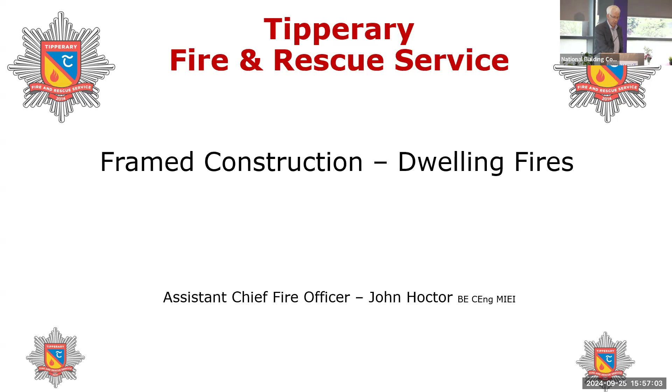So in terms of the actual presentation, I suppose the agenda is around dwelling fires and showing the experience that we are perceiving both here in Ireland and also internationally around dwelling fires. Looking at where house stock has been in Ireland and where it's going, looking at construction trends worldwide, and then looking at some academic literature out there around fire engineering practice and some concerns being raised by some of the subject matter experts.

A quick overview of kind of how we approach building control within Tipperary Fire and Rescue Service. We're both the Fire Authority and the Building Control Authority within Tipperary Fire and Rescue. And then some suggestions that are out there really for discussion. And I suppose what I want to do is acknowledge kind of the work the department are doing in terms of the Fire Research Group and also the group inside in Galway in terms of Construct Innovate and the work they're doing. So they're taking on some of the suggestions that we've been going to raise.

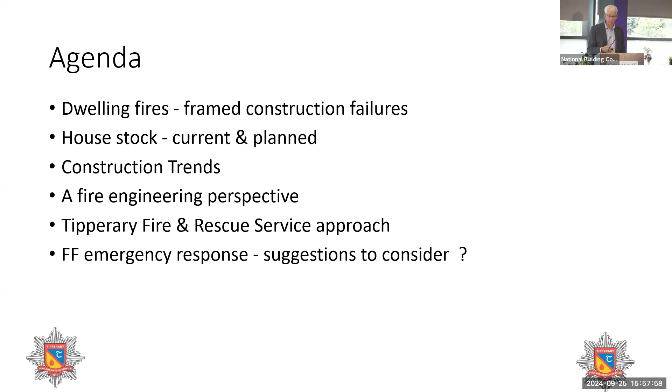So firstly, the good news for fire fatalities in Ireland, we're running at about 6 fire fatalities per million per year. And in terms of all the countries around the world, that's best in class. And in context, the US has got about 13 deaths per million per year in 2021. So we've had a huge reduction over the last generation or so in Ireland, okay?

The department have been very proactive in terms of actually, particularly dwellings, of improving the standard requirements in terms of buildings, and all new construction since the recent revision of Technical Guidance Document B, Volume 2, requires fire detection alarm in all habitable rooms, LD2 classification. They've also published supplementary guidance in terms of achieving the fire standards for fire-resistant construction in domestic dwellings.

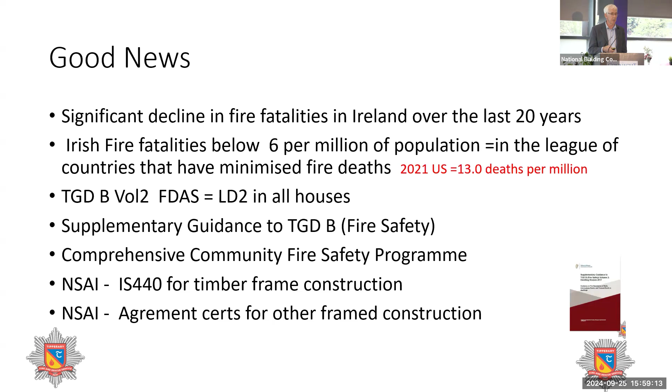And then within the fire service, in conjunction with the National Directorate of Fire and Emergency Management, we have a very extensive community fire safety programme, which is giving us tangible results in terms of reduced fire fatalities. The NSAI are very active in the whole area, and we've got standards in terms of wood frame construction or timber frame construction, IS 440. And then for other frame constructions, there's Agrement certs in place. So it's not a construction methodology that's without any guidance or regulation.

I also want to acknowledge the very busy environment that the National Directorate of Fire and Emergency Management work in. You're probably aware of kind of the industrial action with firefighters last year, and that WRC agreement is still subject to negotiation. We've got this new national mobilisation for the regional control centres being rolled out. We've got an extensive capital programme within the Directorate, and then there's also very extensive work being done in terms of equality inclusion within the fire service. Largely the Irish Fire Service is male orientated, and then the work is now to try and make that more representative actually of the overall community.

We've got a validation process that comes in externally to all the fire authorities. We've got follow-up from the Stardust inquiry, and then for the first time we've actually an urban search and rescue capacity being introduced into the country. So there's a very busy work programme there.

The other thing I want to do is acknowledge the construction sector. This is a report that was published in 2022, which looked at the actual nature of the construction sector and the capability that's there. And what's interesting is that there's 160,000 employees in early 22 working in the sector, but there was actually 58,000 small and medium enterprises, okay?

So the construction sector is made up of very small and medium enterprises. And within Tipperary, our objective as a building control authority is to go along and to foster and encourage those groups. They provide valuable employment to every town and village in the county. They provide support to local sports groups or community groups, okay? And we want them to thrive and prosper. And we see our role within the actual building control sector as working with them in a collaborative manner.

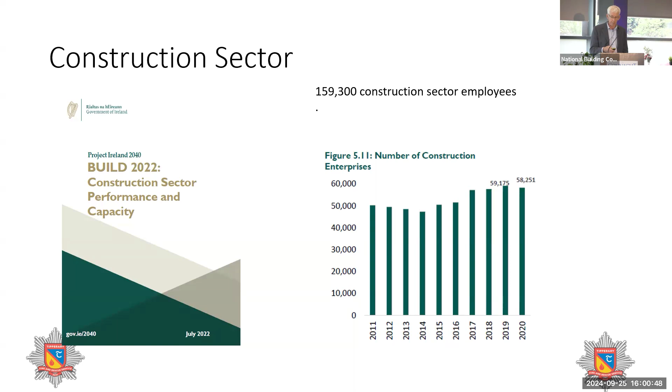So in terms of the presentation, why is this of interest to us as a fire service, okay? And we don't just look internally within Ireland, we also take a look at what's happening internationally. And the NFPA, which is the National Fire Protection Association in the US, publish firefighter fatalities every year. In 2023, unfortunately, there were 89 fatalities, and 40% of those were actually at domestic dwellings, right? And the analysis that the NFPA did said that the injuries that they're seeing are a result of structural fires, okay, due to roof and floor collapses, a reminder that buildings are burning hotter and faster.

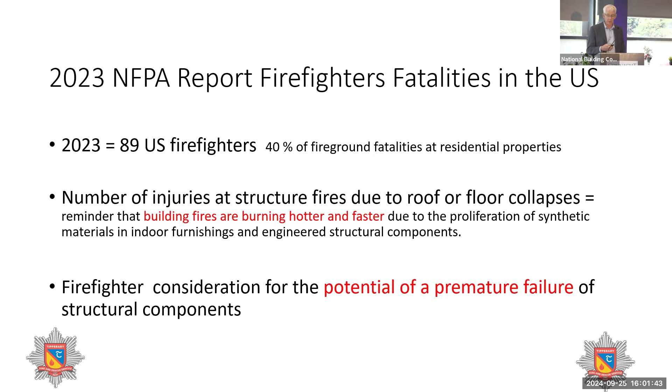And that's very reminiscent of the areas raised by Walter in terms of having scooter fires and battery fires. So we're seeing a change in how buildings are built and the materials inside them, okay? And then in terms of emergency response, firefighters need to consider the fact of premature failure, right, as part of their emergency response.

Why is the US data relevant? This is an insurance industry report looking back in 2011 at timber frame construction within the UK and American sector. And you can see in the table there that less than 2% of dwellings in England and Wales were timber framed back in 2011, 10% in Scotland, and over 90% of dwellings were timber framed in the US. And on the right-hand side there, you can see where sprinkler provisions are required in the US, but the codes back in 2011 had no requirement for any sprinkler protection in the UK.

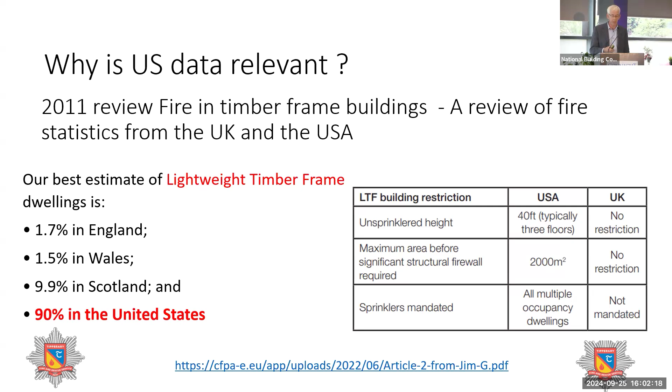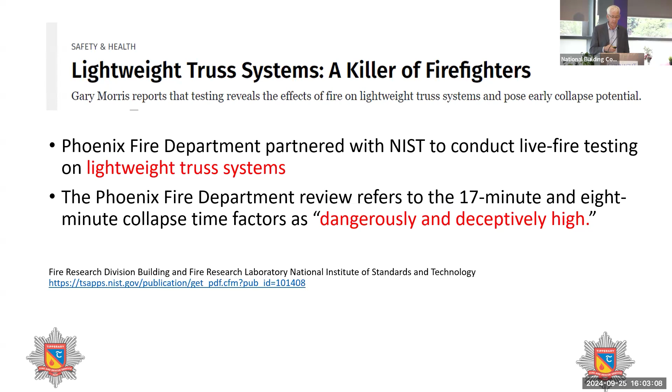What's also happening in the States is some of the fire services are becoming quite proactive in informing their firefighter response to framed construction firefighting. And the Phoenix Fire Department has been to the forefront here, working with the National Institute of Standards and Technology and doing testing not to demonstrate performance, but to demonstrate how framed construction dwellings respond to the point of collapse. And what they're finding is that some of the frame construction will collapse in 17 or 8 minutes. And the analysis says that the collapse times may be dangerously and deceptively high, even from that testing, all right? So that's obviously an issue for ourselves as we look forward in Ireland, right? And again, the link is to the publication at the bottom of the slide there.

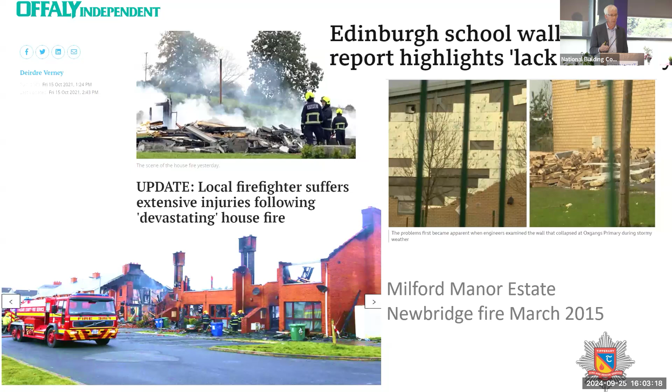So in terms of leading indicators on this side of the water, we've had some indications that maybe frame construction is behaving differently than what we call traditional construction. We had a fire in Offaly back in 2021, where a timber frame structure essentially collapsed and injured a firefighter in the gable wall, perhaps prematurely, and that's on the top left there. We've had the Milford Manor estate fire back in 2015, where essentially there was a terrace of houses, and despite the fire service being on scene within 10 minutes of the emergency service being called, they were unable to save the terrace of houses. And finally, not a fire-based emergency, but the Edinburgh school wall collapse, where again frame construction in high wind conditions, the wall collapsed. So we do have evidence to show that frame construction is behaving differently than we would hope to achieve.

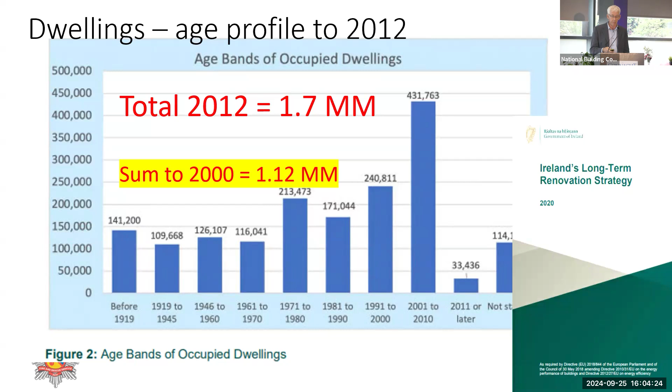In terms of building age profiles, a report published back in 2020 looked at the long-term renovation strategy, and that flagged the age profile of dwellings in Ireland, about 1.1 million up as far as 2000, and through the Celtic Tiger we had a 70% increase to about 1.7 million dwellings. But the dwellings that were built pre-2000 were traditional buildings, so they were all masonry construction and cut timber joists. And again, what I've shown here are some pictures representing the substantial nature of the timber-based construction that was in the houses that were built pre-2000.

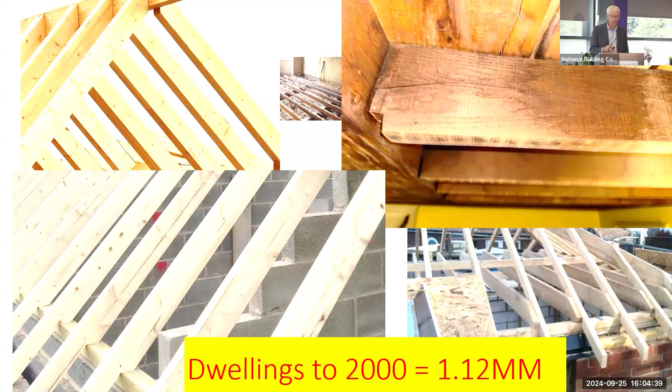Since the downturn, we've started to rebuild again, right? And we've built about 170,000 houses according to CSO between 2016 and 2024. And the breakdown is there in a chart between apartments, housing schemes, housing estates, and single houses. And in round terms, about 20% are single houses, and about 80% are apartments and schemes. Schemes and apartments are subject to certificates of compliance on completion, and we've talked about that in some of the presentations earlier. But the one-off dwellings we see in Tipperary are largely opt-outs.

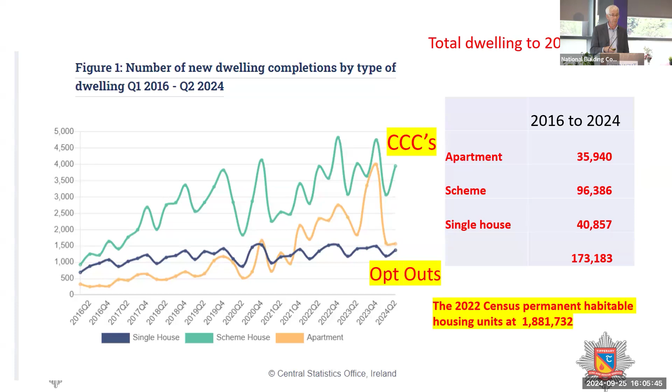So where we are going in terms of housing construction is a big political topic right now. The Housing Commission report is saying we're going to build somewhere between 50 and 60,000. They came up with a number of 57,000, okay? If we roll those numbers out, we're looking at dwellings being about 2.6 million, up from about 1.1 million in 2000, right? So we're seeing a substantial increase in dwellings in Ireland, okay? And a lot of those dwellings will be frame-based construction.

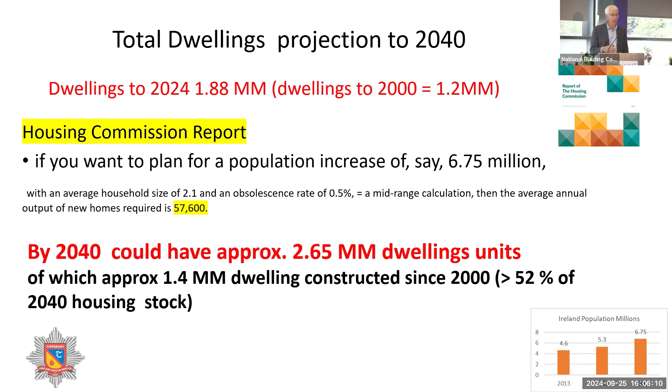In terms of worldwide trends, there's only one way it's going. The population is increasing worldwide. The global building stock is expected to increase like we're seeing in Ireland, okay? But what's also happening is the UN is requiring that not alone are the buildings net operational carbon, but also net embodied carbon as well. And their target is that by 2050, there will be net zero embodied carbon in new buildings, okay?

The report of the Housing Commission is flagging that Irish construction needs to move more towards using timber frame construction. And what's interesting is Scotland is already there. Back in 2023, 95% of housing estates were timber frame construction in Scotland.

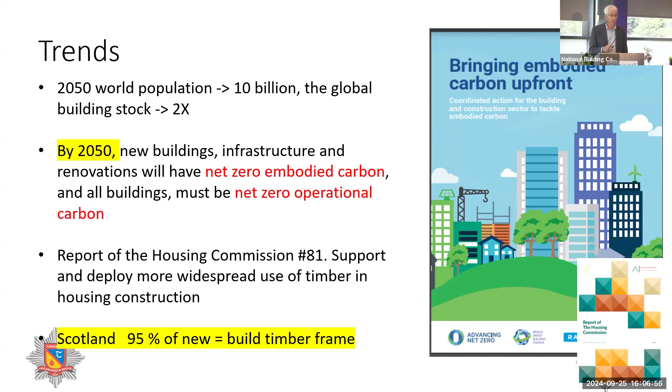What's also interesting is the large consultancies that are doing tall and complex buildings are embracing this requirement to reduce embodied carbon. And Arup, who would be considered one of the leaders in complex and high-rise construction, have published a fire-safe design of mass timber buildings. And this will be essentially GLT, CLT timber systems, okay? And what they're saying is that their designs will work towards net zero by 2050, but a 40% reduction by 2030 in the buildings that they're involved in, okay?

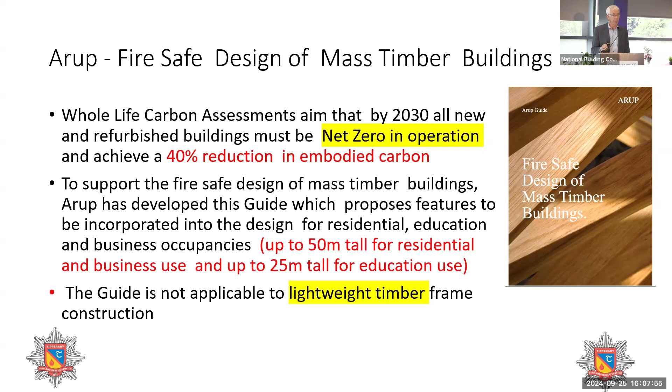But what's interesting is the scale of their ambition. They're looking at 50 metres for residential and business use and 25 metres for educational use. So we're looking at 17-storey buildings for residential and business, and up to 8-storey buildings for educational as timber-based construction, okay? But what's also interesting is that guide is for CLT, GLT, it's not for lightweight timber construction. When you read the guide itself, they segregate the buildings into low-rise, medium-rise and high-rise, okay? And what they consider low-rise is less than 12 metres, which would be a 4 or 5-storey building.

And their approach is that firefighting should be external or else from protected stairs. So our standard approach to doing search and rescue in our old traditional masonry buildings, the designers are now saying, we don't see that as the way forward in terms of firefighting within buildings. And that talks to some of the changes that we're talking about, making sure people can get out of buildings.

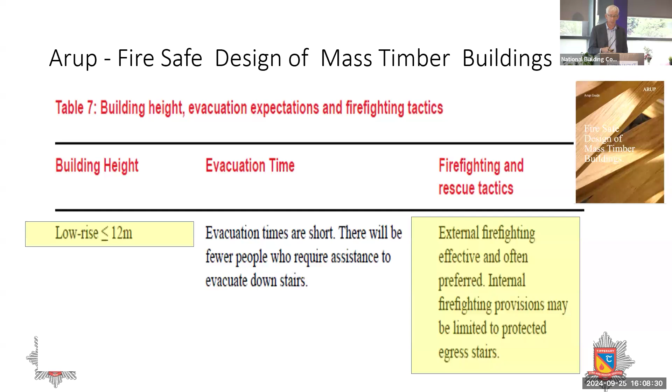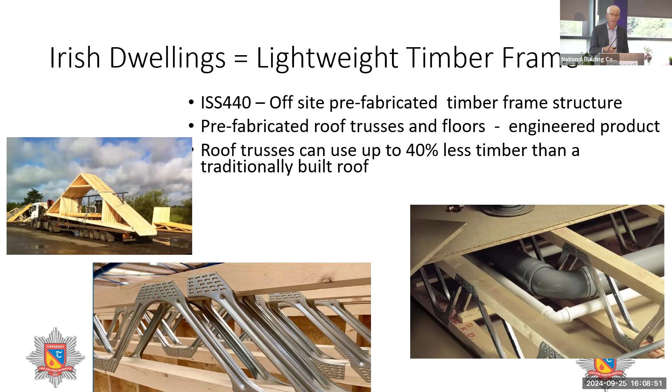So the change that we're seeing within Tipperary and right around Ireland is that IS 440 for timber frame construction is happening. The frame units are coming in on transport, okay. We're seeing a lot of metal web joists, and then we're seeing a lot of services running in those joists, right? And so designers are putting in a lot more mechanical and electrical within what we call traditional dwellings.

So the regulatory environment that ourselves and the actual industry are trying to achieve is the functional requirement in B8, which is equivalent to B3 in Technical Guidance Document B for commercial, that the dwelling house should be so designed and constructed that in the event of a fire, its stability will be maintained for a reasonable period, okay?

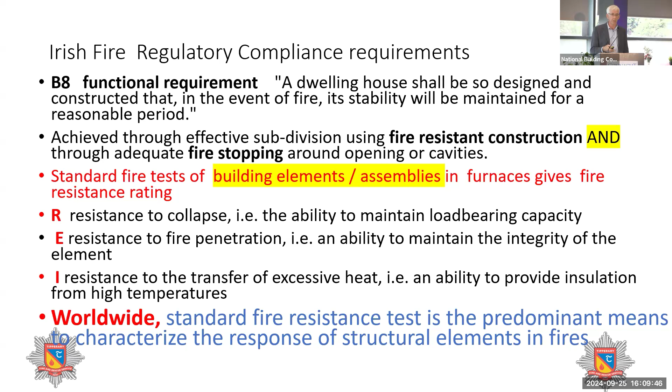And the way that's achieved with frame construction is that we use fire-resistant construction and adequate fire stopping around the openings. And the standard approach in Ireland, in Europe and worldwide is that we do standard tests, and the standard tests come up with a methodology to give you a classification for the build-up in terms of resistance to collapse, resistance to fire penetration, and resistance to excessive heat. And that's a worldwide approach. It's not just something that's within Ireland or within Europe.

But there's caveats coming out there. And there is some academic research out there that's beginning to challenge this approach. The first questions were asked back as early as 1981, where Margaret Law, who's passed away, presented a paper in New York around some concerns with regards to standard fire tests. And what she was postulating, and this was for steel and masonry construction, was that the fire testing was unrealistic and contradicts available knowledge of fire dynamics.

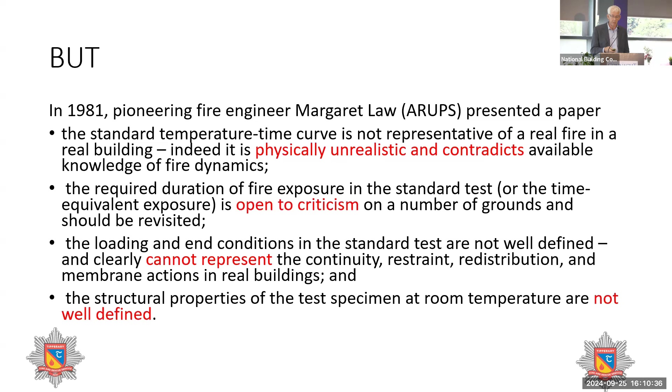She was saying it was open to criticism in terms of the duration. And she was saying the loading and end conditions of the standard test cannot represent the continuity, restraint and redistribution of real buildings. And then the structural properties of test specimens are not well defined. So concerns raised over 40 years ago at this stage. There's a viewpoint in the last 10 years that's beginning to concur with what she raised as a concern back in 1981.

And what some of the academic papers are now saying is that the structural fire engineering community is in a difficult situation, and that the standard fire test has become the performance objective rather than taking into account the real fire risks and the consequent fire failures. And some of the papers are saying that the structural fire engineering community are only just beginning to truly wrestle with the true response of real structures to real fires.

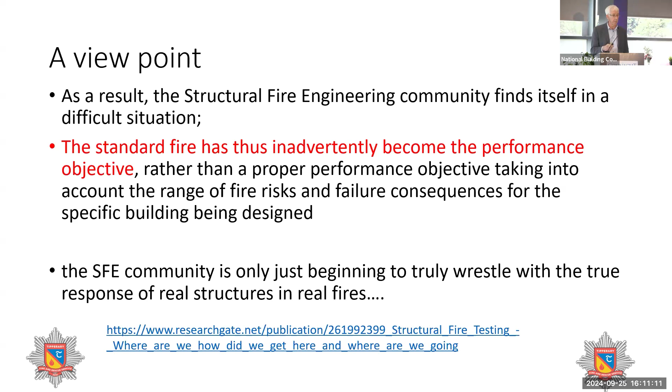On top of that, there's a voluntary group that's run under the auspices of the Institution of Structural Engineers and Civil Engineers in the UK, and it's called the Collaborative Reporting for Safer Structures. And essentially, they have this concept of a reporter, and a reporter is a chartered engineer. And if he or she is working on a project and has got a concern with regards to the way in which fire engineering is done, they can write up the basis of their concerns.

That report is sent on to a peer review committee, and if they feel those concerns are warranted, they'll publish that on the CROSS website. Now, CROSS is not just a UK body at this stage, there's also CROSS equivalents in Canada, Australia, and in the US.

So in terms of light gauge steel structures, which is framed construction, steel rather than timber, one of the reports talks to the concern that was given back to the reporter, the chartered engineer, from the developer. And the developer was saying, I'm justifying one side of testing being provided because the test houses only test on one side, which is true. But the reporter was of the mind that the constraint in testing is not a reasonable defence, given the consequence of premature failure.

And the peer review report that was published said, for fire and rescue services, if you've got structures that don't have all-around testing, that are manufactured or erected out of light gauge steel, fire response agencies need to be aware and take into account in terms of their response that premature collapse may be a real concern.

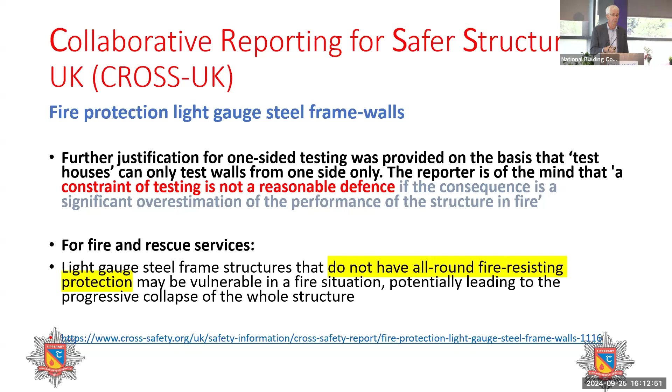So this is all around dwelling fires, but take into account that a lot of frame construction is happening in commercial, industrial and guest-based accommodation. So whilst the presentation was made around dwelling fires, because that's primarily where we see fatalities in Ireland in terms of the fire service, a lot of the points I'm making are just as viable and of interest for frame construction with any building.

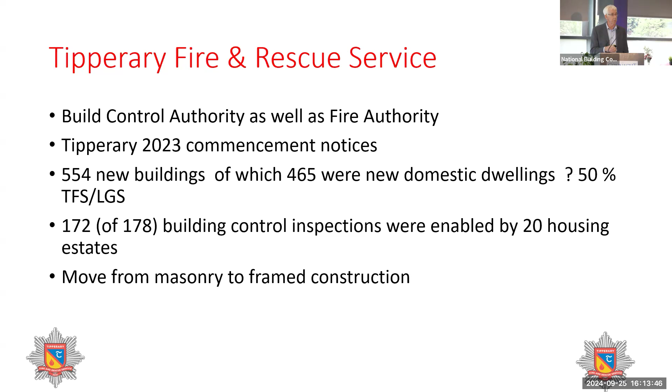So as I mentioned earlier, Tipperary Fire and Rescue Service are a fire authority as well as a building authority. To give you a feel of the activity levels, we had 554 buildings in 2023, of which 465 were domestic dwellings, and about half of those were frame construction, timber frame or light gauge steel. And in 2023 we carried out 178 inspections, mainly focusing on housing estates. And it's very obvious we're seeing the move from masonry to frame construction over the last 5 years.

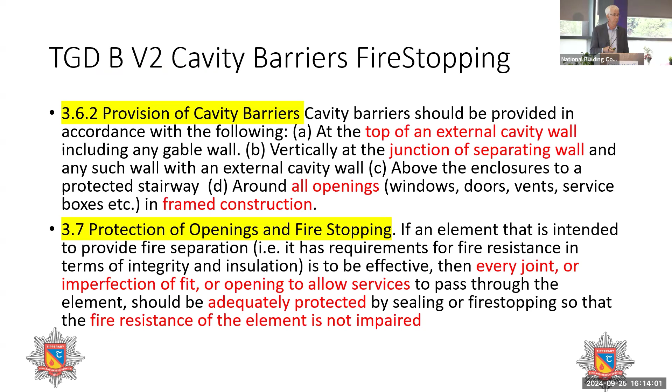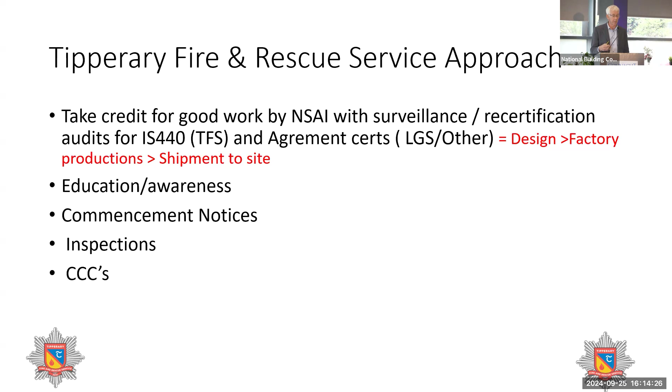As fire officers going out, we're primarily focused on Part B compliance, and we're looking, particularly in frame construction, at cavity barriers, protection of fire openings and fire stopping, given the concerns that are being raised. We take credit for the good work done by NSAI around recertification audits for IS 440 and for the agrément certs. So that takes care of the factory design, the factory production, the shipment to site. And we're really focused on education on site, commencement notices, inspections, and then certs of compliance on completion as a building control authority.

In terms of education, we've done a bit of awareness training around fire resistance versus fire reaction, because we found some of the trades were not well attuned to that. We have a webinar link there on the page below. And what we've done is try to explain to people the requirements for 60 minutes, 30 minutes, modified 30 minutes within dwelling fires. That these are real requirements to make sure people can actually get out.

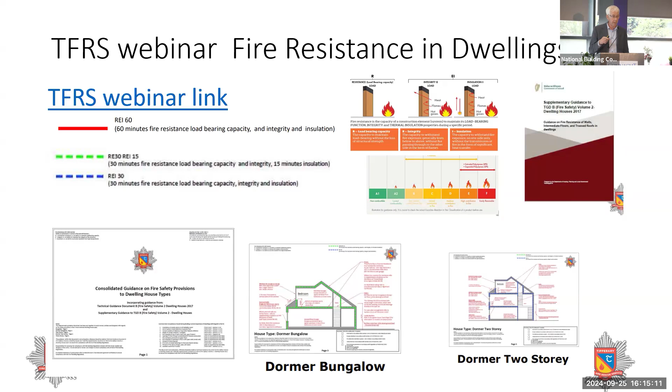And we've also translated some of the supplementary guidance into consolidated guidance for different dwelling types, from a bungalow the whole way as far as a two-storey dormer. And I just want to acknowledge Martin Moore, Assistant Chief Fire Officer, who pulled together the diagrams down below. And if you go to that webinar link that's on the slide there, you'll see all that support documentation.

We do inspections. We tell people we're going to come out. We give them the good news that they're going to have the opportunity to tell us how good they are. We flag problems that we see routinely in terms of non-compliance from Part A to Part M. But we also flag to them that when you're doing certs of compliance on completion in Tipperary, you need to hand in 6 pieces of documentation for each dwelling.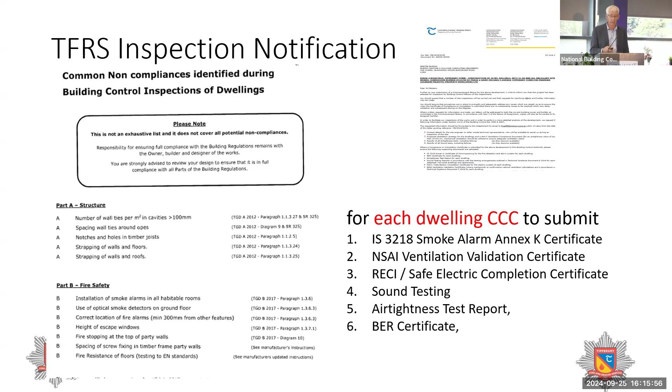So we ask for the Fire Detection Alarm System Annex K certification. We ask for the ventilation validation certification. We ask for the Safe Electric Ireland completion cert, the sound testing certification, the air tightness test report, and the BER report. All right, and that's per dwelling. So there's a good bit of documentation coming in for maybe a 20 house estate.

In terms of inspection plans, we're finding they're doing it in terms of the code of practice. And the code of practice for dwellings is quite simple. It's a 5 or 6 page step inspection routine. But some of the better contractors now are coming up with what they call a design responsibility matrix. And they're flagging who's doing what, particularly around fire stopping, and taking responsibility either for the frame manufacturers doing it or the contractors doing it.

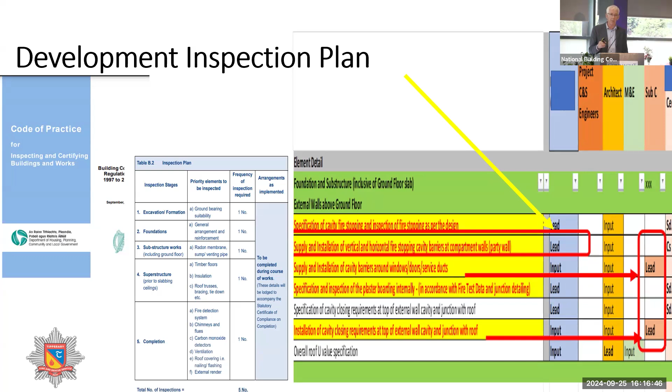And you can see an example there on the right-hand side where the party wall has been done by the frame manufacturer, and then the gable ends and the cavity barriers around the windows are being done by the main contractor. But that's clearly been indicated up front as part of the inspection plan.

We're also finding some of the contractors are now using cloud-based technology. So we go out to the site and 10 houses are at second fix with the roof on. And we said to them, can you show us evidence of where those houses were before you closed up?

They're able to pull up on house number 4 pictures of the actual roof and the actual cavity barriers and the actual stopping in the party wall, the separation that's required under IS 440 between the air gap between the actual dwellings, and then the build-up before they actually framed off the party wall internally on the top right there.

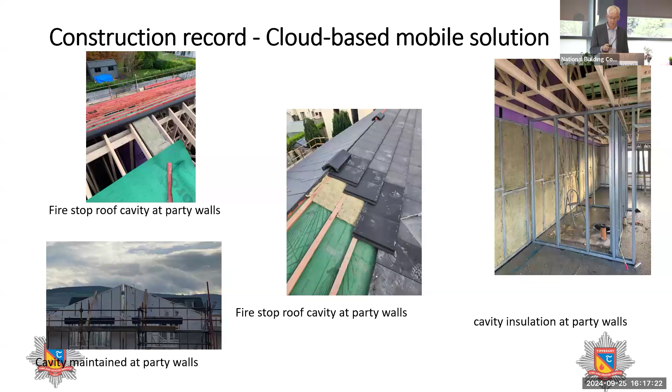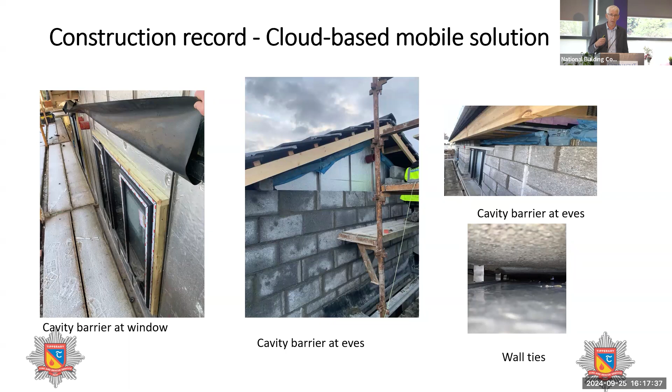This is again showing some pictures they have on their cloud-based apps for the fire stopping and cavity barriers around windows at the gable end and also at the actual top of the external walls, and also showing pictures of wall ties. So they're becoming more evidence-based. Not all contractors, but some of the better ones.

We're also finding, and again it was subject to some of the discussions earlier by Connell, we're seeing a lot of supplementary design cert CS and CSS certifications coming in, right? This is for a 20 housing estate that came in, okay? And we got in a total of 15 different supplementary certs from there, okay? And we're getting those on top of the 6 documents that we require per dwelling for each of the 20 houses. So we're seeing quite a deal of evidence of good quality work coming at us from these housing estates.

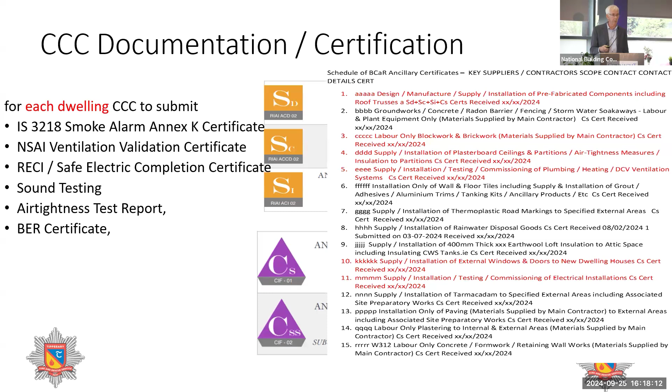So where does that leave us in terms of a response agency, which is really the group that I was talking to down in Limerick 3 weeks ago? What I was suggesting to people was that by 2040, somewhere between 33% and 50% of dwellings that we are doing an emergency response to for dwelling fires will be frame construction. And in the US, they're telling us that premature collapse is a possibility. And they're also saying that using thermal imaging cameras is not a good predictor of when the collapse would happen.

So in terms of technical guidance document B, section 0.1.1 says the guidance document is protection of life. And as a fire authority we have statutory responsibility for the safety of firefighters that are making a fire response to a fire in that dwelling. So premature collapse is a statutory responsibility of the response agencies in terms of the firefighters responding. And then section 5 talks about protection of life and property, right? So they're the requirements in the guidance document. But there's evidence out there that early collapse is a real possibility.

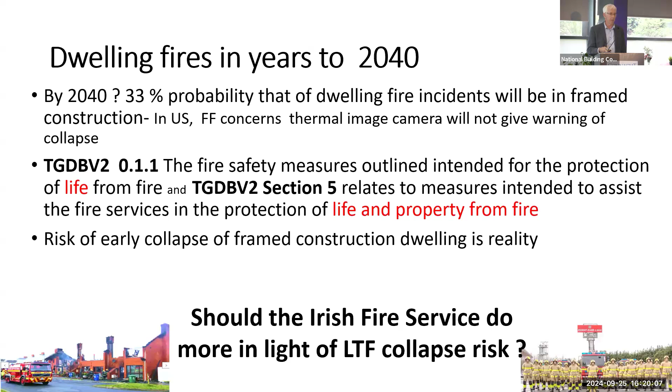And the question I was asking senior officers in Limerick 3 weeks ago was, should the Irish Fire Service be doing more to advocate for the firefighters who will be responding by 2040? And I'm doing that in the context of 2 items. One is the premature collapse of the dwellings in Millfield Manor in Kildare about 7 years ago. And the other is the recruits class in Dublin Fire Brigade in 2018. Those young men and women are just starting their career at this stage. They'll still be fighting fires by 2040. And what should we be thinking about in terms of making their life more safe as they respond to the emergency calls that we're getting from the general public?

So I'm giving these as suggestions, really to open up discussions. They're not recommendations coming from Tipperary Fire Service or from the fire authorities around Ireland, okay? One of the areas is that for firefighters, we do a lot of training in terms of orientation, BA, which stands for breathing apparatus, and CFBT, which stands for compartment fire behaviour training, looking at how firefighters respond to fires and making them aware that frame construction may respond differently than houses that were pre-2000, okay? And then our command courses also need to take that into account, because early collapse is a real possibility.

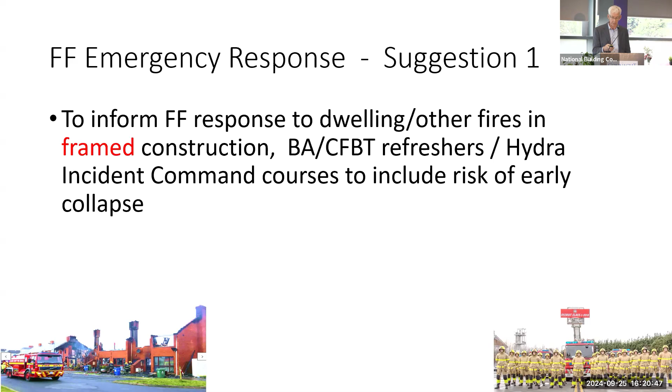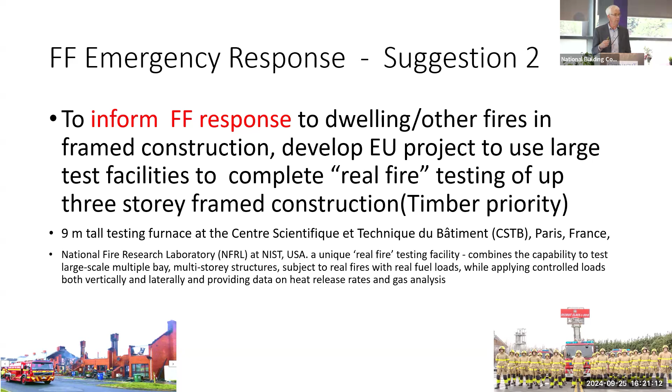The other one is that Phoenix Fire Service in the States has been an early adopter of doing testing, not to show how good the building is, but testing it to destruction, showing what possibly can happen. And maybe there's an opportunity to work with other fire services around Europe to use some of the test houses either in Paris or that have been used by the Phoenix Fire Service in the US to do large-scale testing of dwellings and see how they actually respond.

The other item that we're seeing on our side as a building control authority is there's lots of statutory registers and documentation coming at us through the guidance document around the RGI certs, the fire detection alarm systems, the ventilation validation, sound testing, RECI certs, air tightness certs, BER certs.

And should we be looking for supplementary guidance out to the industry in terms of how people specify, procure, install and verify cavity barriers and fire stopping, particularly around frame construction? And should we be looking for that as a plan at a commencement notice stage and then looking for verification at completion stage? Again, an item for discussion with the frame manufacturing sector.

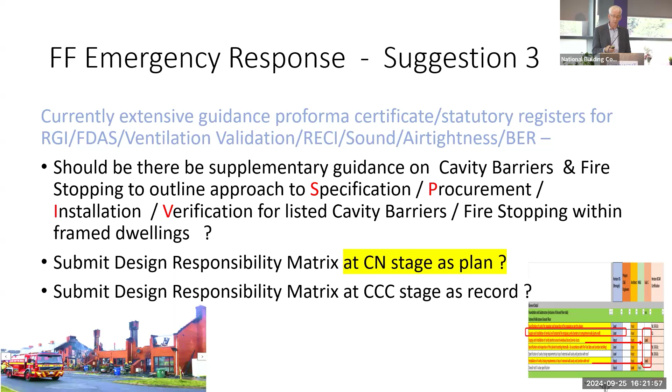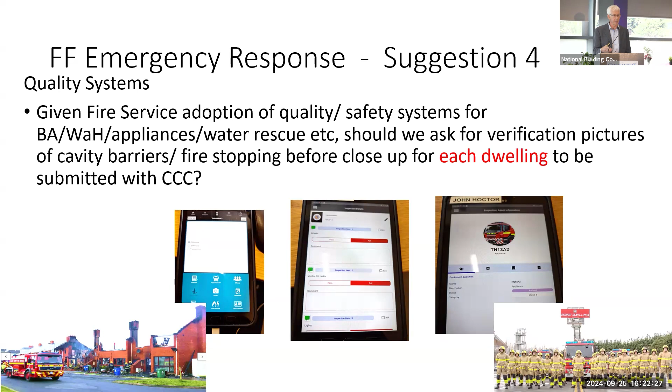The other issue is that some of the contractors are addressing cloud-based technology. And what I was saying to the fire service was that over the last 10 years, we've gone through a huge transition moving away from paper onto cloud-based systems for doing checks on our life-critical systems around water rescue, appliances, breathing apparatus, and they're the pictures of the tablets that we use locally within Tipperary. But should we have that expectation that all sites that are building residential-based construction have that cloud-based technology and they're keeping evidential records per house that they can submit?

The last point, which again has been talked to in terms of B12 on the revised Technical Guidance Document B, which is owner information. When it comes to dwelling houses, there's a poor understanding out there in the trade community and the owners that a frame construction dwelling is different than a masonry dwelling. And you can have unanticipated or unintended diminution of the build integrity, either through maintenance, through alterations, through extensions, that can have a very detrimental effect in terms of fire safety.

And what we're suggesting maybe to consider is that there would be a QR code on the actual meter box to be there as a resource for both the owner and the tradespeople to say, this is this dwelling, here are the characteristics, and here's what you need to be aware of when you're maintaining, altering or extending this building itself.

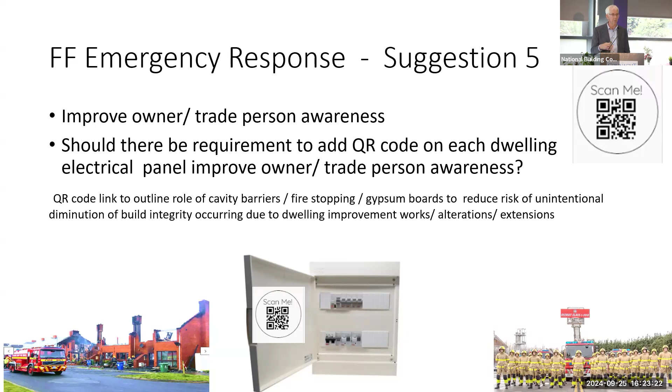And the final suggestion is my own, based on a course that I did back during COVID, which was a certificate in enforcement in public bodies run by the Law Society. One of the lecturers on the course was a guy called Kieran Walker, who works in the area of financial regulation. He was looking at the way in which the public respond to regulation. So when something goes wrong, whether it's in the building sector, the healthcare sector, or the educational sector, the public and political response is we need more inspectors. And the Edinburgh wall collapse, lack of scrutiny.

But what they're beginning to find in the financial services sector is that the evidence suggests there is a limitation to the extent to which greater compliance can be achieved by increasing fines and the probability of detection. And what they're switching to is behavioural economics: changing the drivers for the perception of detection and punishment, debiasing both individual and firms' decisions around risk taking, rebalancing the role of morality when you're making decisions, and then looking at culture.

And I suppose the question I had for both the senior fire officers in Limerick and for the industry from a wider perspective is, should we be looking at behavioural economics? And trying to change the culture and looking at the roles of morality and risk-taking as we move forward.

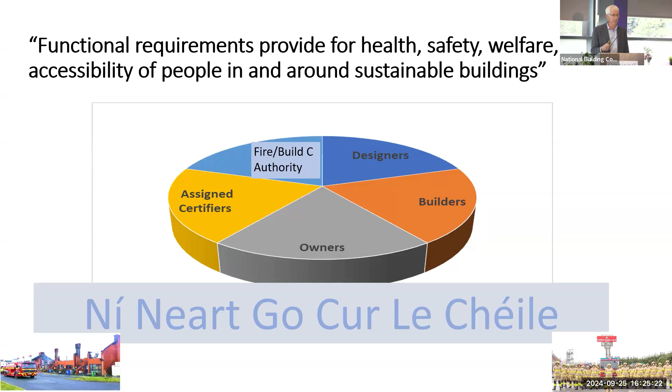So I'm going to finish going back to the very start, which is that the building regulations are all about functional requirements to provide for the health, safety, welfare and accessibility of people in and around sustainable buildings. Nobody argues with that. There's lots of stakeholders out there: the fire authorities, the building control authorities, designers, builders, owners, assigned certifiers. Our objective within Tipperary is to work on a collaborative basis and to go back to the Gaeilge, Ní Neart Go Cur Le Chéile.